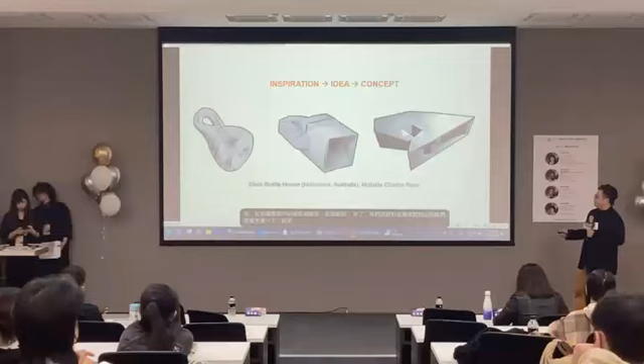Alright, so we have the process here from inspiration to idea and to concept. We need to think about that. For example, this one is the Klein Bottle House in Melbourne, Australia, designed by McBride Charles Ryan. And you can see that is an inspiration. He got the inspiration from the Klein bottle, and then it develops into the ideas and then the final concept of the house here.

Inspiration. What is inspiration anyway? Inspiration is something that makes someone want to do or to feel something, especially something creative. For example, you may be familiar with this one. It's Monet. And Monet once said the richness I achieved comes from nature, the source of my inspiration. And it's true, because you can see that most of these paintings got inspiration from nature.

And then what is an idea? The idea is an initial thought which just appears and may be viable. But an idea is not a concept yet. We need to select the ideas and develop them further in order to transform them into the concept. For example, if you have a mattress and you combine that with the very American breakfast, this becomes air bed and breakfast, and now it has become Airbnb.

But actually, at the beginning, it was just an idea to combine the mattress with the American breakfast. Two American students wanted to make some more income, so they rented out the living room in their rental apartment with a mattress, combined with some American breakfast for the renter at the beginning.

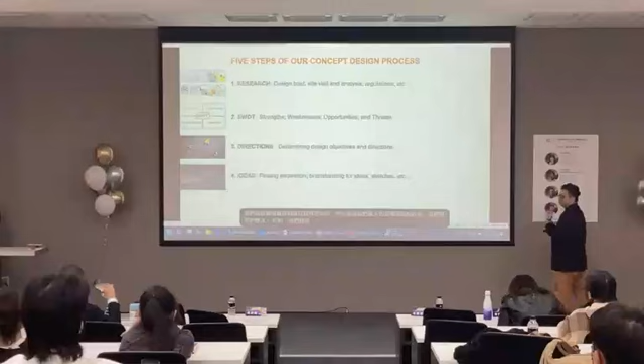And then from the research, the SWOT and directions, we get into ideas. We find inspiration, brainstorm for ideas, sketches, etc. And finally, from directions and ideas, we get into the final concept of the project, with diagrams, drawings, models, etc. I think you are familiar with that one. But that is the process that we have here: research, SWOT, directions, ideas, and concept.

And then we run through the 4 properties of every design concept. It has to have a level of creativity, so it delivers unique value to the project stakeholders as well as the public. Secondly, it needs to be a problem-solving solution. It solves the problem or challenge of the design brief or the context. And then simplicity, it needs to be very simple. It can be described in just a very simple diagram, short phrase or image.

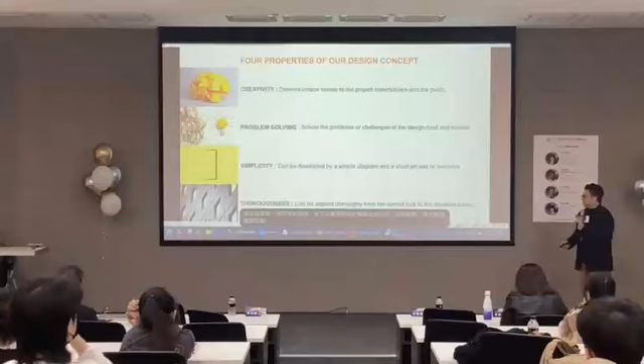And finally, it needs to have a level of thoroughness. It can be applied throughout the project from the beginning to the end, from the overall look to the smallest details of the project. So creativity, problem solving, simplicity, and thoroughness are four properties of our design concept for almost every project. And then I would like to introduce to you our concept design team.

So I went through the concept design phase and process of our studio, and now I quickly move to case study 1. Again, we do the research. It is a very tiny site, just 18 square meters, located in the middle of the neighborhood, in the alley, in the city center of Ho Chi Minh City in Vietnam. The design brief asked for a 2-bedroom home for a young couple on the ground level. Other requirements are security, privacy, and 1 bedroom may be rented out as an Airbnb business later on.

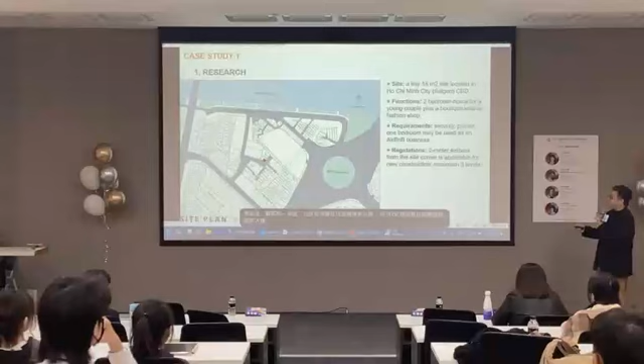The regulation is that if we build a new building, we need to have a 2 meter setback from the corner here, because the site is located at the corner. So a new building here needs to be maximum 3 levels, and it has an angular, triangle setback of 2 meters from the building corner. So that is the research. We did the site investigation.

This is the existing building here: ground level, mezzanine level, and the second level on the top. The house is very old, very dark inside. It has brick walls and columns as the main load-bearing structure. It had been badly damaged and abandoned for months before we got into the design of the new house.

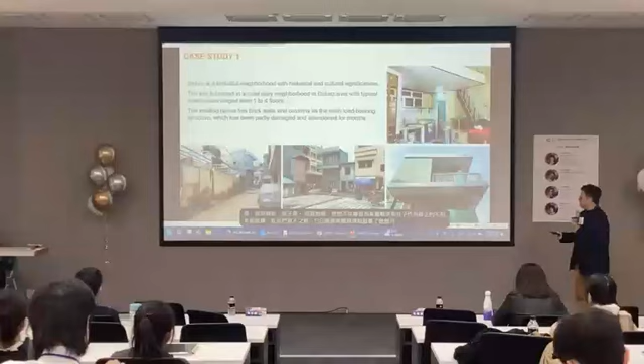So we do the SWOT. Okay, the building, the project has some strengths and some opportunities here. The first strength is that it has 2 main frontages. So the opportunity here is we have the advantage of convenient traffic and the view: traffic to the side and the view from inside to outside. It has a southeast and northeast orientation, so it has a chance to have good natural ventilation and daylighting.

And another strength is the rectangle shape, so we have a chance to optimize interior layout and dimensions. So it's quite easy in terms of dimension and layout. But the thing is that the project has very important weaknesses here. First of all, it has a tiny area of just 18 square meters, as I mentioned before. So the thing here is we may not have enough space for the required use, because we have 2-bedroom homes and a shop as well.

And a 2 meter setback at the corner is required if we build a new building. Okay, you see that the existing building doesn't have any setback, but if we knock it down and build a new one, it needs to have a 2 meter setback from the corner. So the new building would be even tinier than the old one. It would have ended up with just 16 square meters. Another weakness is the badly damaged and unstable structure, which leads to construction and long-term risk in the future.

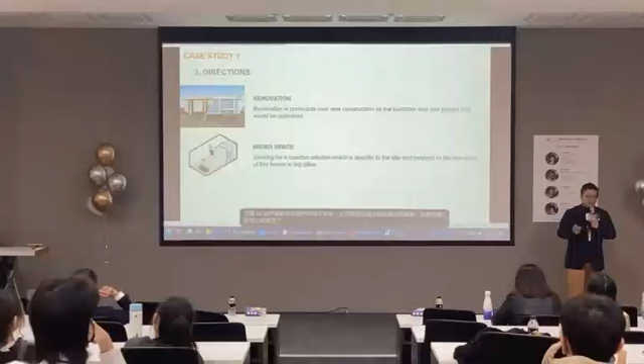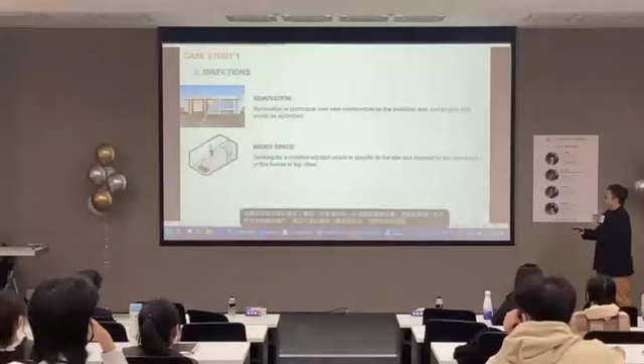Okay, we try to seek a creative solution which is specific to the site and responds to the new trend of tiny houses in these cities. I'm pretty sure I have seen in magazines some tiny houses and apartments in Taiwan as well, I think. Yeah, and in cities around the world, not only in Vietnam, but also maybe in Japan, we have the trend of tiny houses, because the land cost is so expensive, so the tiny house in existing cities is a new trend.

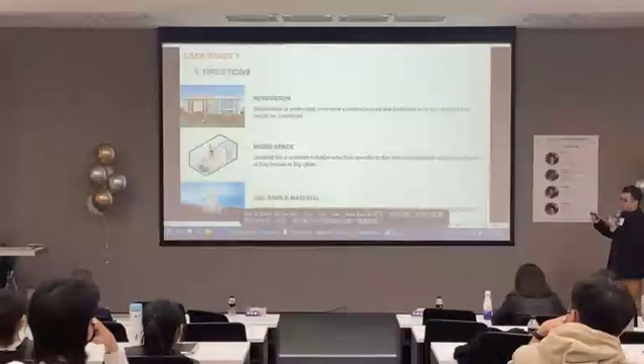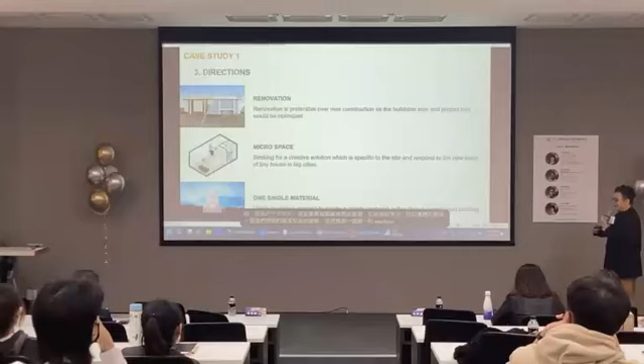Okay, and we want to use a single material because the size is so tiny and the building is maximum 3 levels. It's very, very small, so we don't want to make an overcomplicated building. We want to use a single material and make a very small building but a landmark within the neighborhood. Alright, so after we established the 3 design directions, we moved to the ideas, thinking about how to move toward the 3 design directions specific to the site and the design requirements. So we have some ideas.

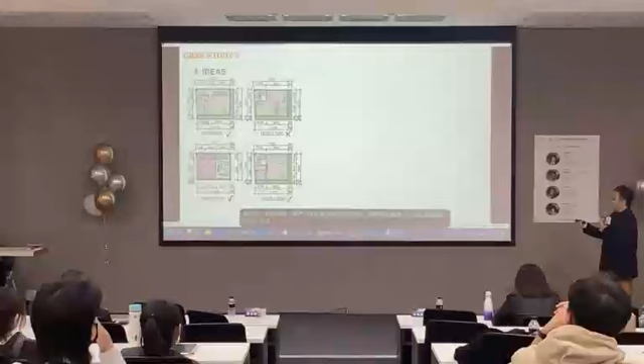Okay, we sketched out the floor plans: how we configure the parking space, the bedrooms, bathrooms, the staircase, how to utilize the space, how to save the space, how to use the square meters better. And then we want to combine it with a single material, maybe glass block. Glass block may bring in more lighting and is able to ensure security and privacy in some ways. So we want to combine those 2 elements into something.

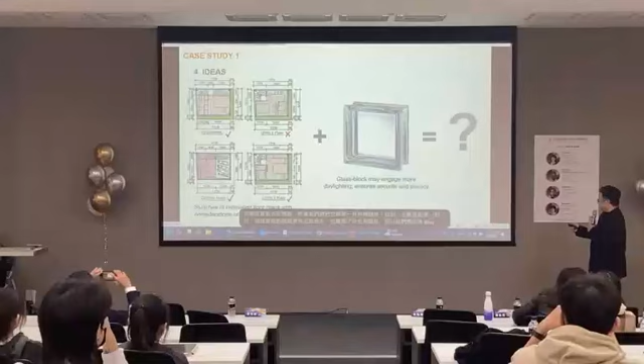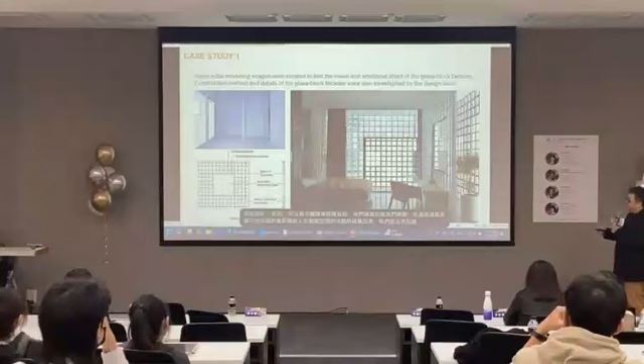So we continued brainstorming ideas. We did some rendering images showing the visual effects of the light getting into the interior space, and we even investigated the installation methods and construction details of the glass block facades here with integrated windows. And then after that we established a concept. We call it Glass Block House.

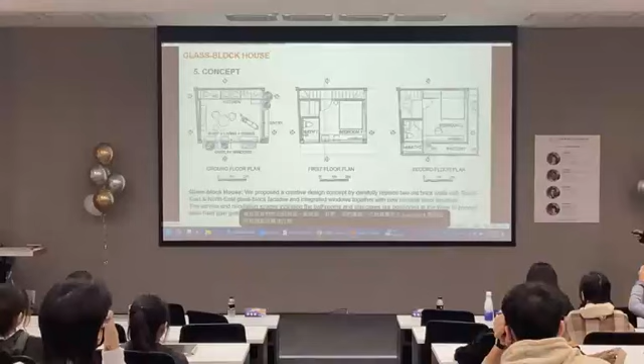That is the final floor plans. We propose a solution, the design concept, by carefully replacing the old main facades here, 2 main facades, with glass blocks, and integrate windows together with the minimal steel structure.

And you see that the service core here, which is the bathroom and the staircase over here, are located at the west to prevent the solar heat getting into the interior space. And the main space here is the shop on the ground level, and the bedrooms on the top levels, as well as the balconies located on the desired orientation.

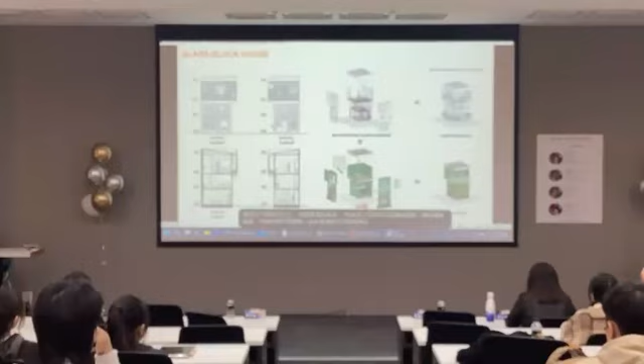That is the elevations, sections. That is a very informative diagram showing the old house. And then we just remove some of the unused or unusable parts, such as the brick facades, the staircase, interior material, and the roof as well. We just remove to keep the main structure, and we put some additional structure here, which is the steel columns and beams, and we put together the glass block facades and the new roof here.

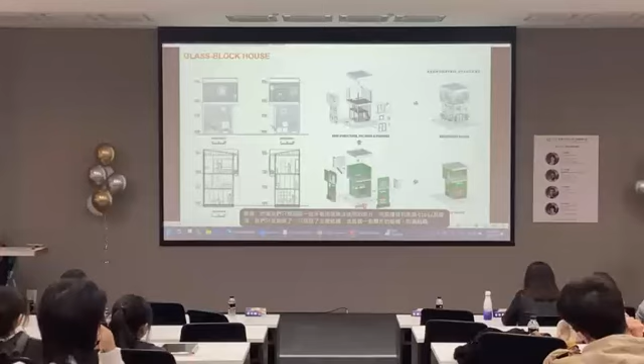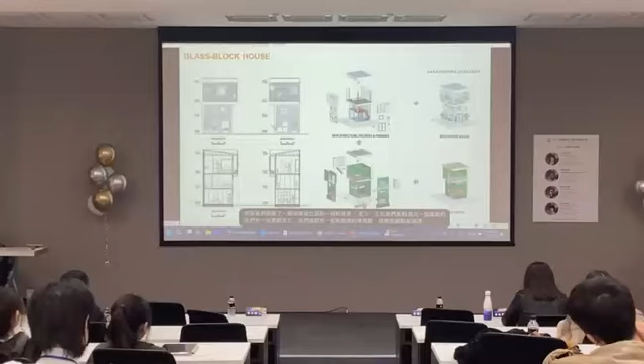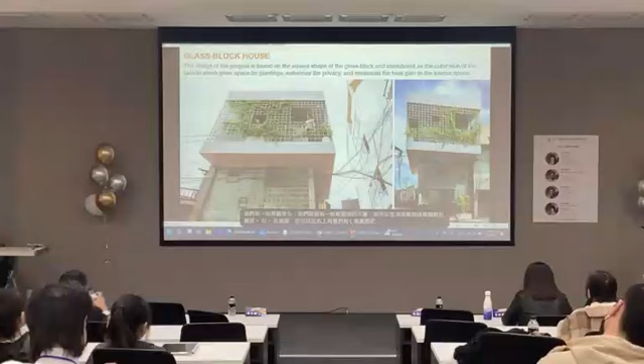And finally we have the balcony, we have some landscaping, we have some plantings here for the new building, and these renovated buildings here. You can see on the top corner. Right. From here you can see that in the top corner we have an L-shaped balcony here with the pergola. The pergola is acting as the outer skin of the facade, which gives the space for plantings, enhances the privacy, and minimizes the heat getting into the interior space as well.

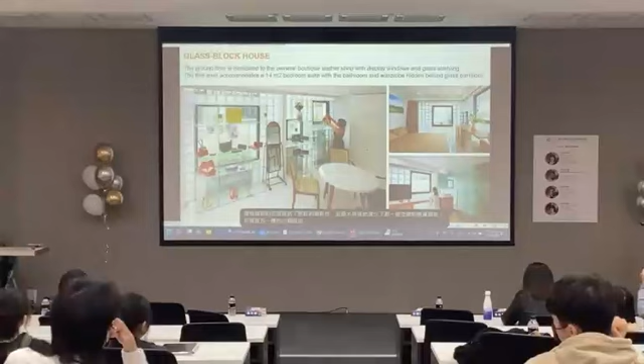And if you look carefully, you can see that the square shaped windows and doors here are located at different angles, to prevent the direct sight from the neighbor's house getting into the interior space of the bedrooms here. And then the sunlight is filtered by the plantings and the glass block facades before lighting the interior space. It's not direct sunlight, it's reflected or translucent sunlight getting into the space, making a very impressive visual effect and emotional effect as well.

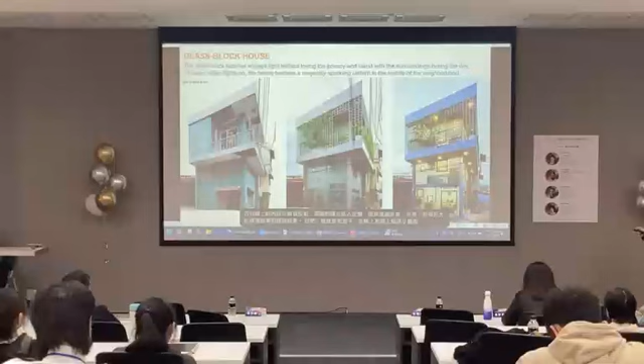Okay, that is the old house. That is the renovated one at daytime and at night time. So at daytime, you can see that the glass block facade engages light without losing the privacy. You can't see through it and it blends with the surroundings during the day, with the sky, with the neighborhood houses and the landscaping. It's just blending with the context.

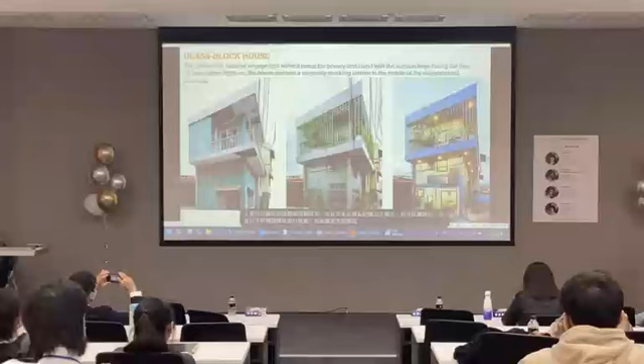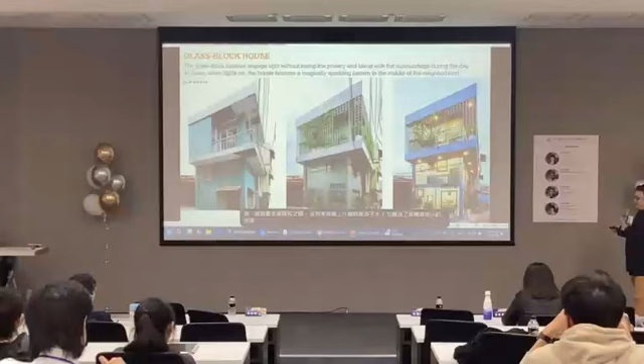And then at dusk or at night time, when the lights are on, the house becomes a lantern in the middle of the neighborhood. It becomes some kind of landmark, a very small landmark at the corner of the island. So we call it the glass block house. Very small one, 18 square meter site and about 60 square meters in total net floor area.

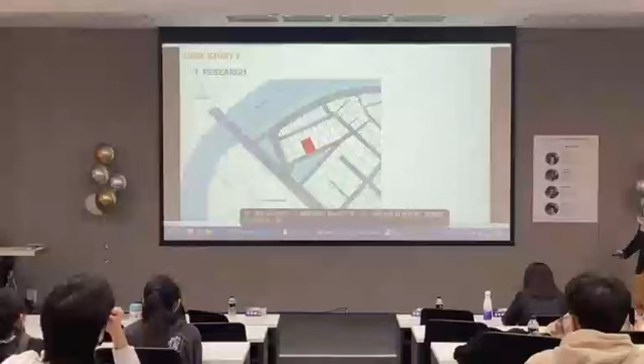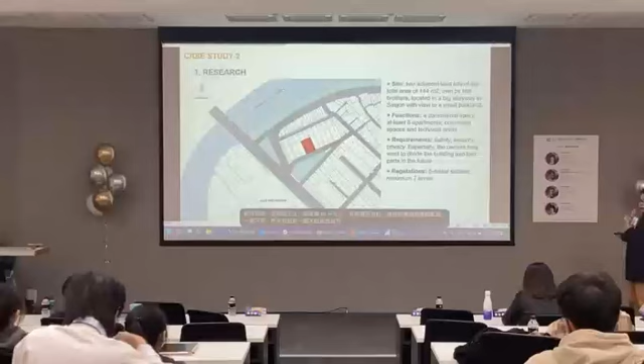Right, and then case study 2. Okay, I hope that this one may be a little bit bigger. Alright, again we have the site plan here, showing the site. It's 2 adjacent land lots with an area of more than 140 square meters, owned by 2 brothers. Each of the land lots here is owned by 1 brother. And it's located in a big alleyway in Saigon, quite close to the CBD, with a view to the small parkland here. It's very rare in the context of the dense urban city here. We have a small parkland here.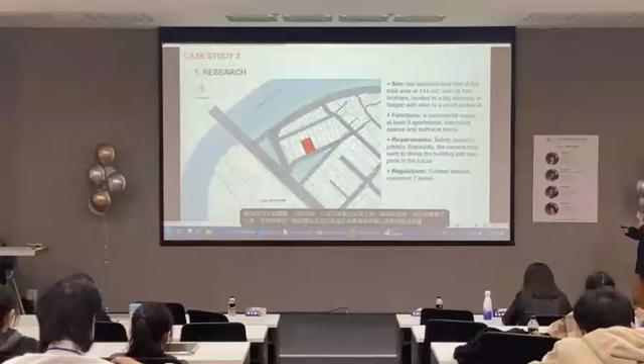Okay, a very big advantage. The function needs to have a commercial space on the ground level, at least 8 rental apartments, and we need to have communal space as well as technical areas and a lift and circulation space as well. And other requirements: safety, security, privacy, and especially the owners may want to divide the building into 2 halves in the future.

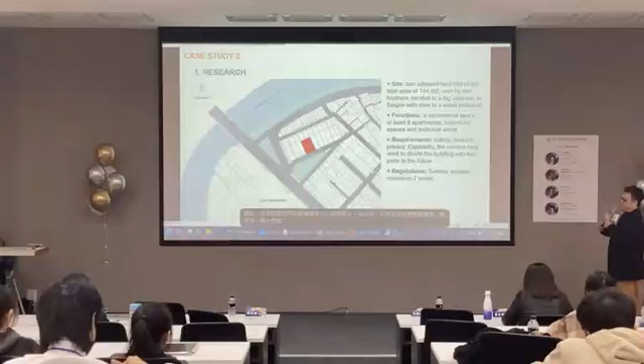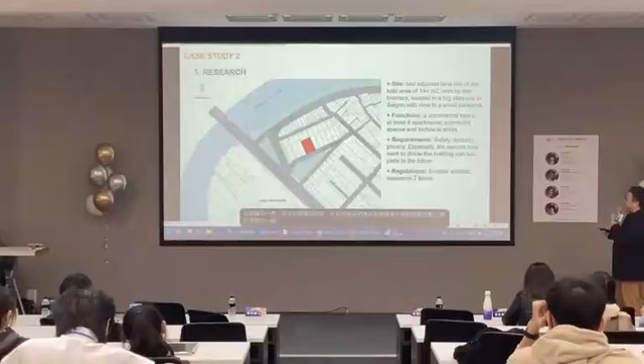Because at the moment they want to join them together to become a big building, but in the future maybe they want to divide it into equal parts, like the previous existing land lots here, because they may have different financial plans in the future. So that would be a very big challenge for us. And another regulation is that we need to have a 5 meter setback from the side boundary and maximum 7 levels.

Right, existing photos. Okay, from the main street here, that one is a very famous street, the big street connecting the international airport to the Ho Chi Minh City CBD. So the site is just here, and you can see the building in the future from the main street here. Okay, this is the existing building here.

Okay, one land lot, another land lot here next to the other. And then because there is a parkland located in front of the site, when you come up to maybe the 2nd or 3rd level, you can have a very good view to the canopies of the parkland and the city downtown, far away.

And SWOT, strengths and opportunities here. Okay, we have some strengths here. It has a close distance from the main street, so the building would be visible from the main street. It's good for business, right? Because it rents apartments and commercial space, it needs to be visible from the main street.

It has an 8 meter wide walkway, so it has convenient ingress and exit. Rectangle shape combined site, so it has a chance to optimize floor plan dimensions. And again, we have a beautiful parkland located in front of the site, so we may have a pleasant view to the landscape in the future if we build the right way.

So we look for ideas. Alright, so on the left hand side you can see some beautiful photos of famous cities around the world, like Paris, Amsterdam. I'm not sure what this is. This one should be Times Square in New York, and that one is in Saigon. And on the right hand side you can see some beautiful photos of nature. Maybe the water, the earth, the forest, the trees, stuff like that, very nice.

And the city is a symbol of human creation, and the garden is a smaller version of nature. So we want to combine the city with the garden as the interconnection between architecture and nature. So we want to combine the photo on the left hand side with the photo on the right hand side, the city with nature, the city with gardens.

Alright, and then we look for ideas, we do some sketches of the forms. Many sketches were produced. We have some ideas for proposals, and only the most reliable ones were selected as an initial concept, which is this one. You can see that it has a sense of stacking, a sense of connecting, a sense of community here, a group of buildings, a group of apartments, a group of spaces stacking together. And then we propose the design concept of city and gardens.

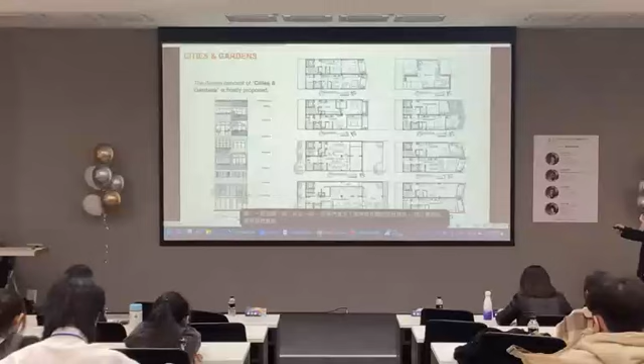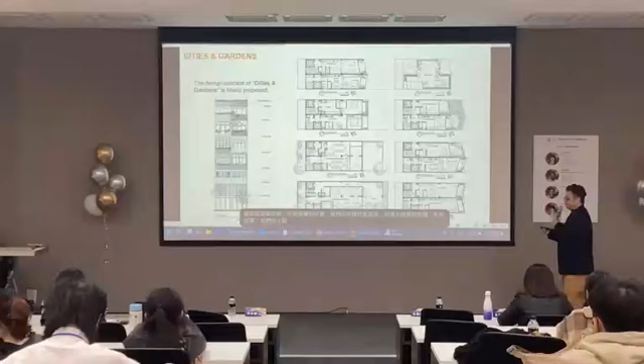You can see here is the floor plans. On the ground levels and the mezzanine levels, we have some kind of community area. That is the cafe and co-working space. And on the upper levels, we have 9 rental apartments. So if we ask for just 8 rental apartments, we could do 9 of them. On the top here, we have a rooftop garden as a community space as well.

And then, if you look at the elevation, you see different houses, a group of stacking volumes, balconies stacking together, as it becomes a 7-level building here.

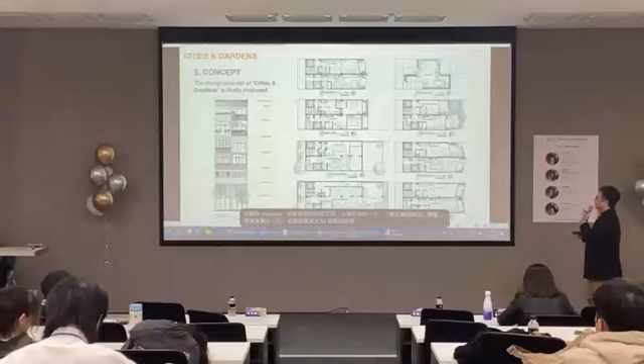Right, and we need some rendering images. We need to pay for that. We need to pay the salary for that. We don't have students to work for us, right? So it's quite expensive to hire people to work for us here.

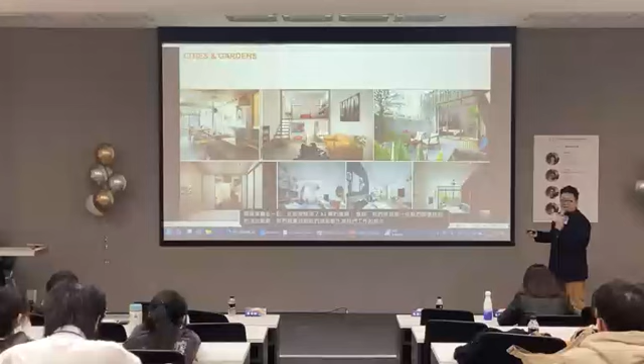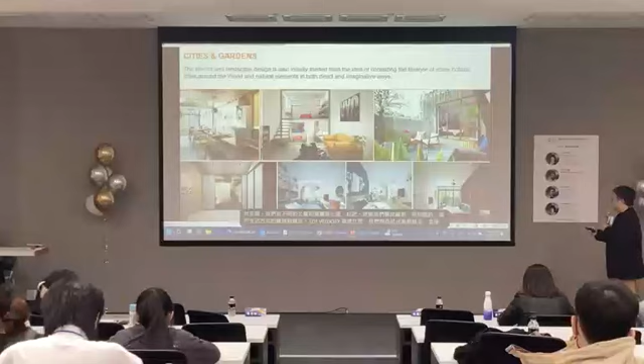And then we have some rendering images of the inside space, like the coffee shop, and communal space on the ground levels, and we have different apartments and landscaping area. And then we try to have the inspiration and concept of the cities, of the lifestyle of some notable cities around the world. We combine with natural elements in both direct and imaginative ways. That is the final building here.

You can see that a group of angled balcony blocks finished in different materials express the individuality within an impressive yet coherent form. The building not only reflects the vibrancy and diversity of Saigon, but also engages to connect with nature at the same time, because we put all the balcony blocks here with all kinds of different plantings and landscape design.

And we have the connection between the landscape space inside the building and the parkland in front of it. So we try to have the connection between inside and outside via the proposal of the balcony blocks here, the different blocks here.

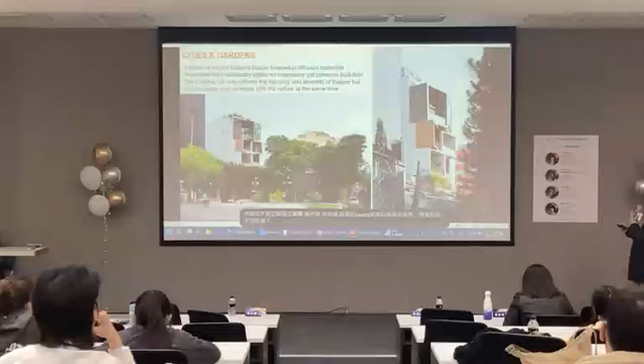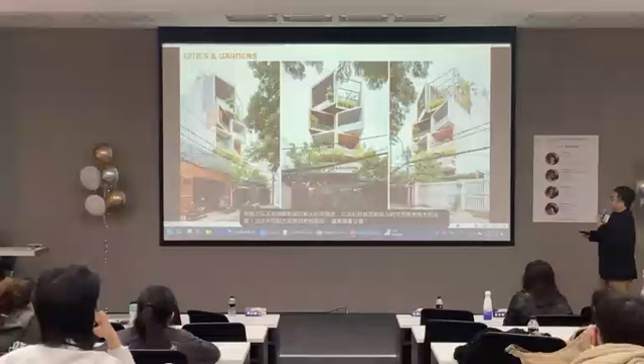And then different blocks have different materials and rotate at different angles to embrace the individuality as well as the diversity of the interior space, as well as the lifestyle around the world combined with nature in different ways. Closer look at the facades. Okay, this one is just behind the trees.

We call it the Tokyo Home. Yeah, we have Tokyo Home here, right in Saigon. This one we call the Parisian apartment. This one is the Earth Garden. This one is the water space. And the one here is Copenhagen Attic. This one is the New York Loft, and this one is the Forest Lodge. Okay, I run through to the interior space.

On the ground and the mezzanine level is the Working Saigon Cafe and co-working space where guests can relax, share the table, meet each other, and interact with others. And then we have Tokyo Home here on the second level. It's a very peaceful space with design experience we learned from Japanese architecture. We have quite a lot of Japanese people who come here to visit and stay, both on Airbnb and long-term rent.

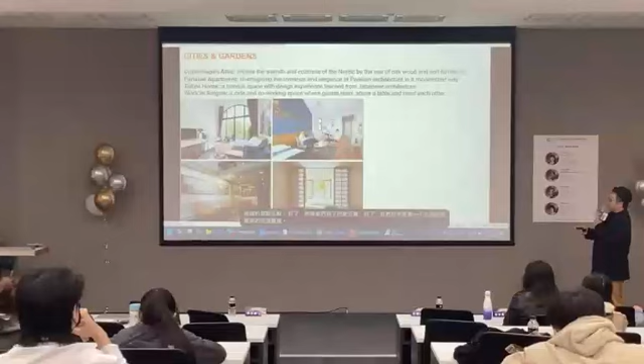And then we have the Parisian apartment. We try to reimagine the romance and elegance of classical Parisian architecture in a very modern way. That is the Copenhagen Attic, very Scandinavian style. That is the New York Loft over here. That is the double space. Actually, you have 3 levels here, 1, 2, and 3.

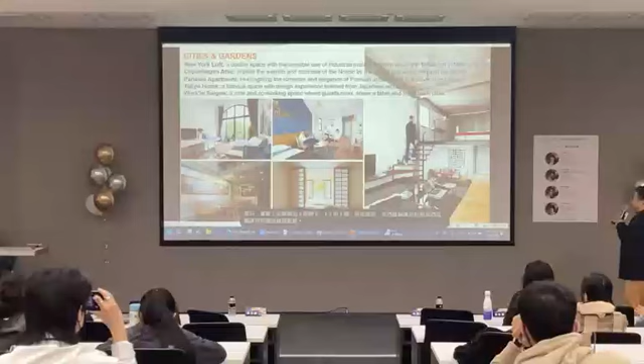We try to play with the configuration, with the heights, with the ceiling, and with the layouts of the rooms. And then we use industrial materials. We recall the 1950s loft in New York. Maybe familiar with Taiwan, right?

And then we also have some apartments here which are very close to nature. The Earth Garden here. We use a very vernacular style of Vietnam and show some local materials like brick and ceramic and so on. That is the water space. Actually, it doesn't have any water inside, but the design of it, the dynamic of it, is an imaginative water body, finished with transparent and translucent materials. The Forest Lodge looks like a wooden cabin in the forest, right in the middle of the city.

And then we have the Earth Garden, the Saigonese terrace here, located on the top floor, finished with traditional materials, with a Saigonese style terrace. You can see here, with local herbs, vegetables, very outdoor living, very Saigonese. So we have some kind of movie here. We need to have a look.

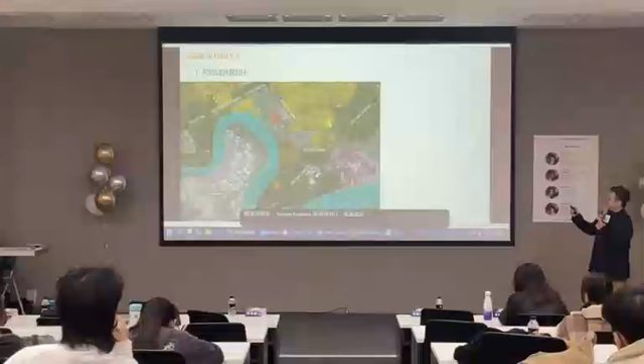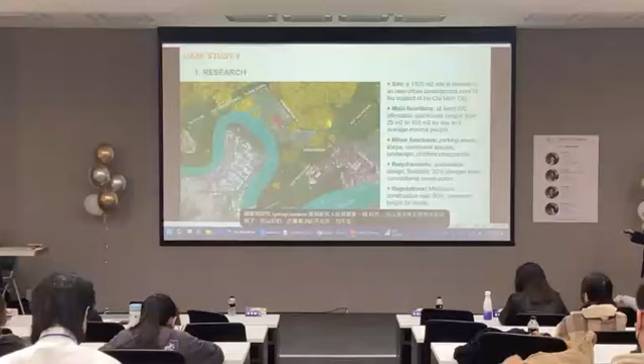Alright, so that was the second case study, Cities & Gardens. Case study 3, which is the last one. Okay, so I won't take much more of your time. Next one is the big one, the big project. 7,500 square meters in size, and it's not located in the center of the city. It's located on the outskirts of the city, in a new urban development area.

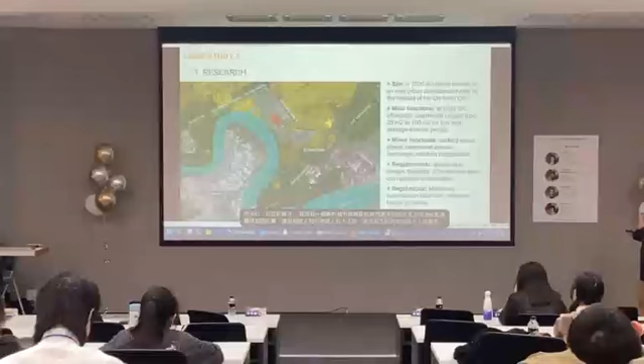The design asks for at least 200 affordable apartments for local people, for the low and average income people who live and work in the local area here. And other functions like parking area, shops, communal space, landscape, children's playgrounds, etc. Requirements: sustainable design, flexibility, and especially we need a solution 20% cheaper than conventional construction. Very big challenge, because this is affordable housing.

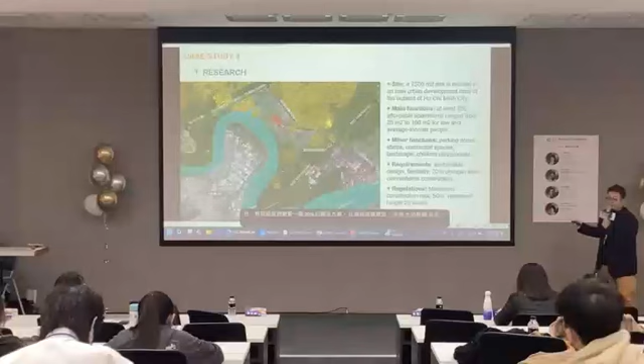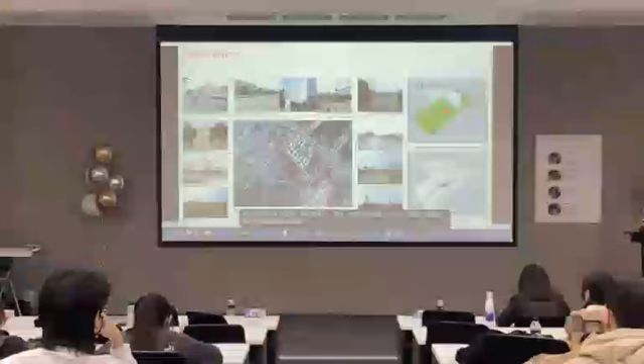And then we have a regulation of maximum construction ratio 50% only, maximum height 20 levels. That is the site. Again, we did site analysis, investigation, checking photos, and all the surveys. And also connectivity, views, landscape analysis, wind and solar access studies here, all the diagrams. At the beginning as the research, and then we do the SWOT. We have some strengths here.

First of all, the site is in a new urban development area, so it can enjoy proximity to the amenities in the master plan. Because it's a new overall master plan, we have school, supermarket and everything. The site has 4 street frontages, so it has convenient, effective ingress and exit. The parkland is located in front of the site, so residents can have a pleasant view and access to the public parkland. With the southeast main orientation, we may engage with southeast and southwest wind.

The only weakness we have is 20% cheaper than conventional construction. So actually it's not a weakness, it's a challenge. If we don't end up with a creative design solution, the project would be a failure, a total failure, because it's not usable anymore. So we went through the design directions.

We talked about modular prefabrication, because by using modular prefabrication we can standardize dimensions and structure, producing off-site, reducing cost and time, and we hope to reduce the construction cost by 20%. Flexibility and expandability: we try to enhance expandability and flexibility according to the future needs of the residents.

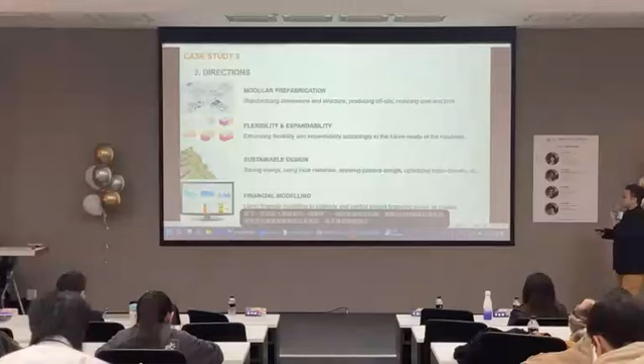Because we are architects, designers, contractors, we hire financiers to establish a financial modeling team, to estimate and control the project finance during all phases, from pre-construction to design to construction and post-construction as well, to make sure that it is affordable. So, from 4 directions: modular prefabrication, flexibility and expandability, sustainable design, and financial modeling.

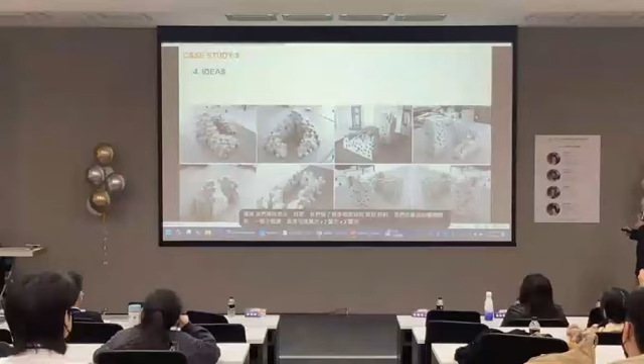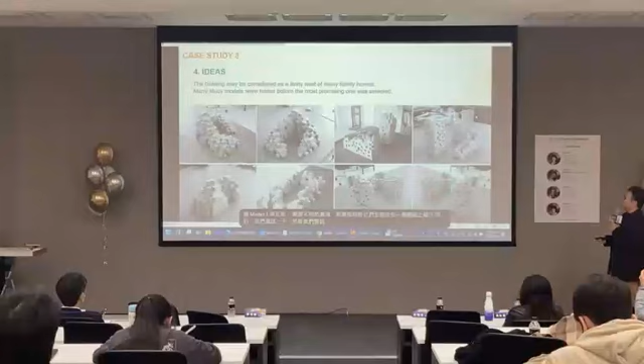We looked for ideas. We did a lot of physical studies, models. We started from a small cube of 2 centimeters by 2 centimeters by 2 centimeters to make different configurations. We call it one module, one unit, and we tried different options for how to put them all together on the site. We tested that and then selected the most promising one as a concept.

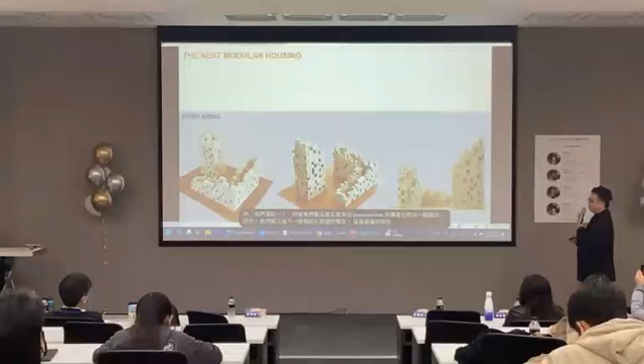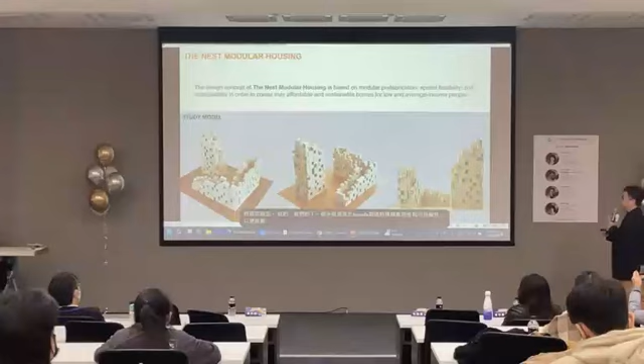And the concept we call the Nest Modular Housing. That is the final study model before we developed it into the final concept. The Nest Modular Housing is based on modular prefabrication, spatial flexibility, and sustainability in order to create truly affordable and sustainable homes for low and average income people in the local area.

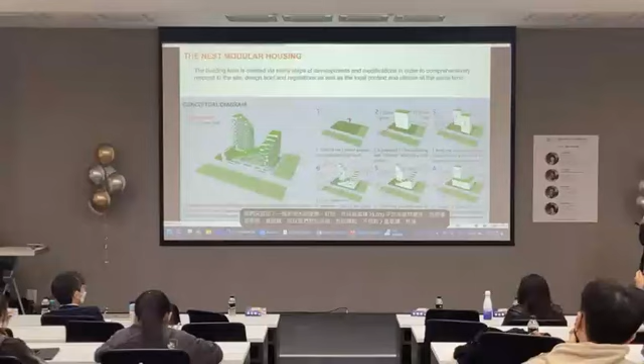Alright, so this is the conceptual diagram. This is an empty land, 7,500 square meter empty land filled with white bush. And then we just propose a very big building here to achieve the 25,000 square meter NFA as the requirement. But it was too big, so we divide it into 2 towers. And then because 2 towers is too conventional, we try to make it different as well. So one tower building and another one L-shaped building, the low rise.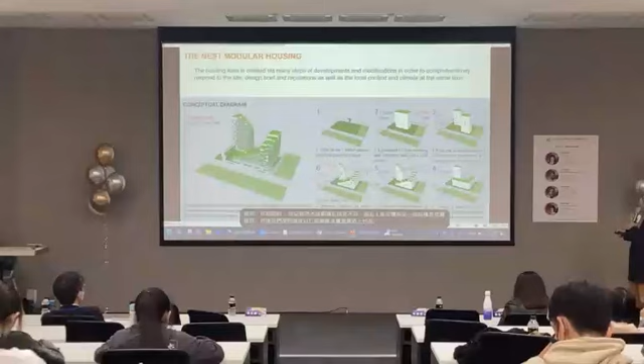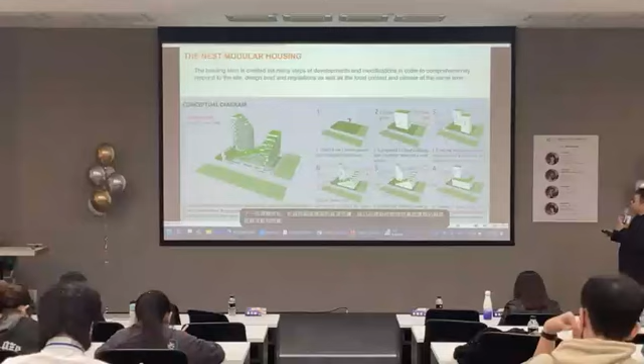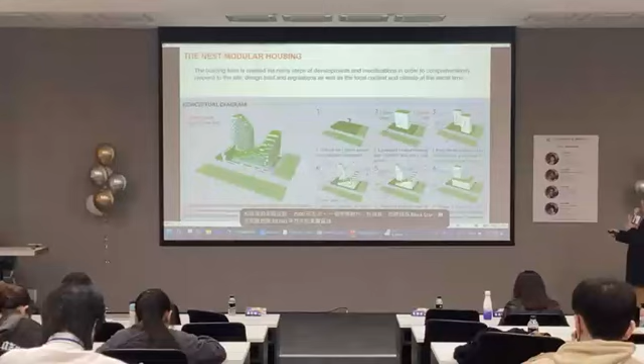And then after that we vary the height to open the views and to cut the wings as well on the diagram. And then finally we put some landscaping on the balconies as well as the rooftop of the 2 buildings here. And this has become the final proposal here. And then from the 7,500 square meter green land, we replace that with 10,000 square meter of green area, from the ground level up to different levels and to the rooftop. And then we achieve 25,000 square meter of net floor area.

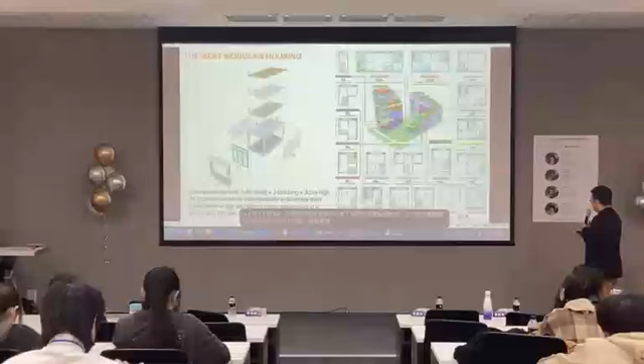Alright, we start from the module, the core structural unit, 3.6 by 3.6 by 3 meter. All modules here can be manufactured in factories, transported to the site and assembled in fast, timely and efficient construction methods. That is the core structural module. And then this is the diagram showing the configuration and the location of different apartments, different types for different kinds of families, inside the 2 buildings in the whole project here.

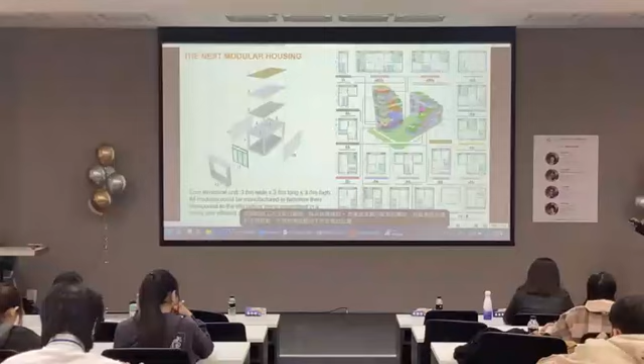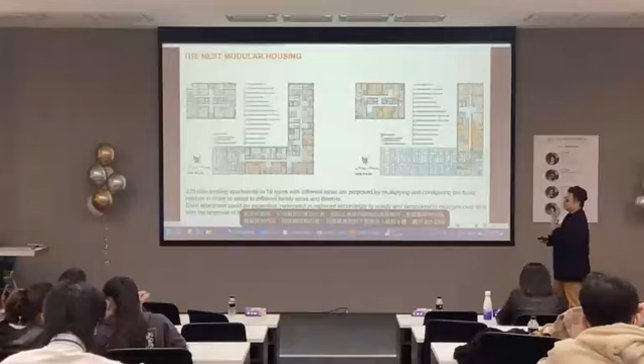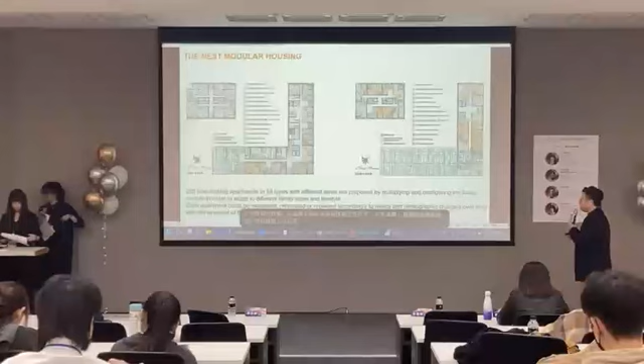This one is the typical floor plan, level 3 and level 9. Remember the project just asked for 200, but we achieved 225 interlocking apartments in 16 different types and sizes, by multiplying and configuring the basic modules in order to adapt to different family sizes and lifestyles. So the very important element here is that each apartment could be technically expanded, renovated, or replaced according to the needs and the change of the families over time. Of course, with approval from the local authority and the community as well.

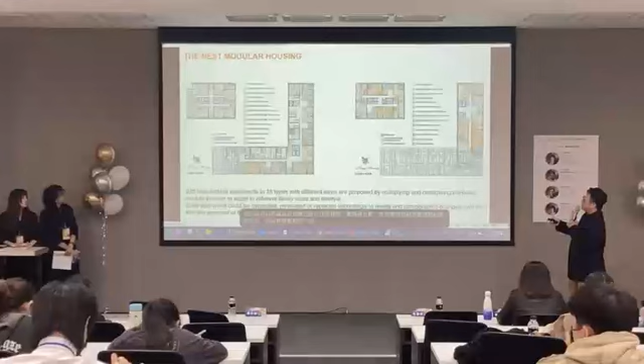So you see that there is some hole here, some empty space for people to build up, renovate or expand their apartments in the future. Alright, we apply many sustainable design strategies into the design of the building, like natural ventilation, water saving, sunshade devices, footpaths, and all the landscaping as well. So we try to put sustainability as the main factor, the main direction of the project.

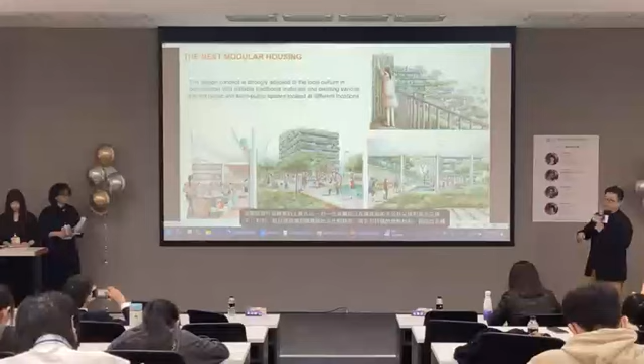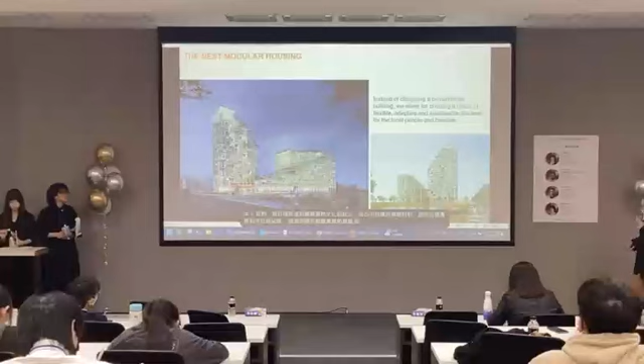Right, some sketches showing the semi-public space and public space of the building. The design concept is strongly adapted to the local culture in Vietnam, in combination with sustainable traditional materials, creating various public and semi-public spaces at different levels and locations. That is a rendering image showing the overall building. Instead of designing a conventional building, we try to create a group of flexible, adaptive and sustainable shelters for the local people and the families.

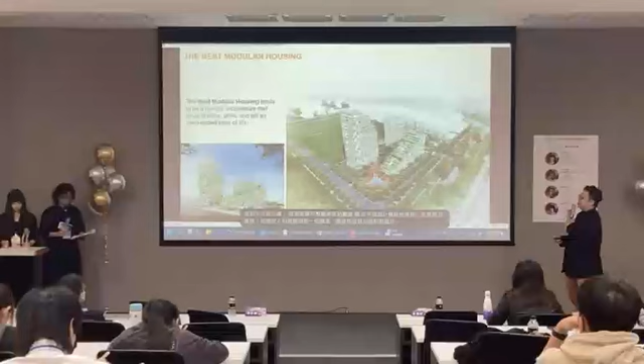In my view, the Nest Modular Housing tends to be a humble architecture that could breathe, grow and tell an open-ended story of life. So, thank you. That's my presentation. Thank you very much.